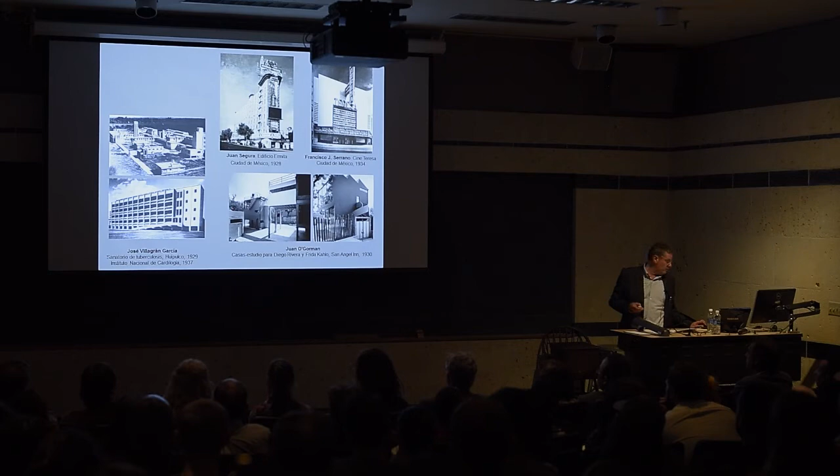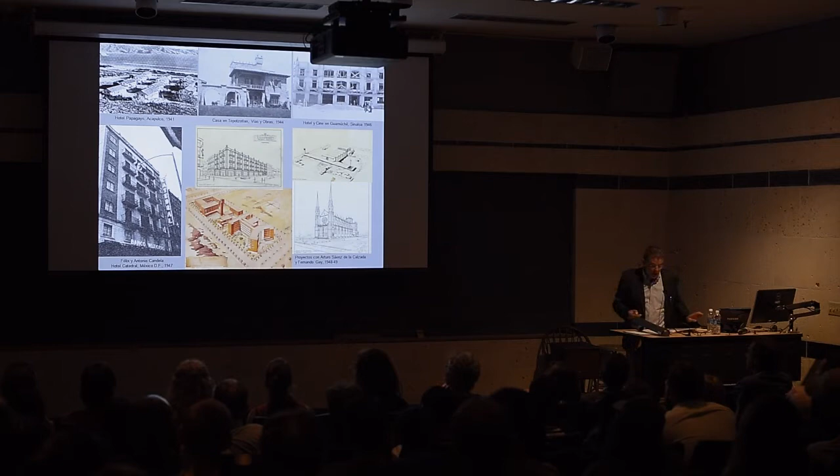And those are some of the projects which Candela made in his first 10 years in Mexico. If Candela had continued doing this kind of buildings, we wouldn't be speaking now about him. What is it that he made which brings us to talk about him nowadays?

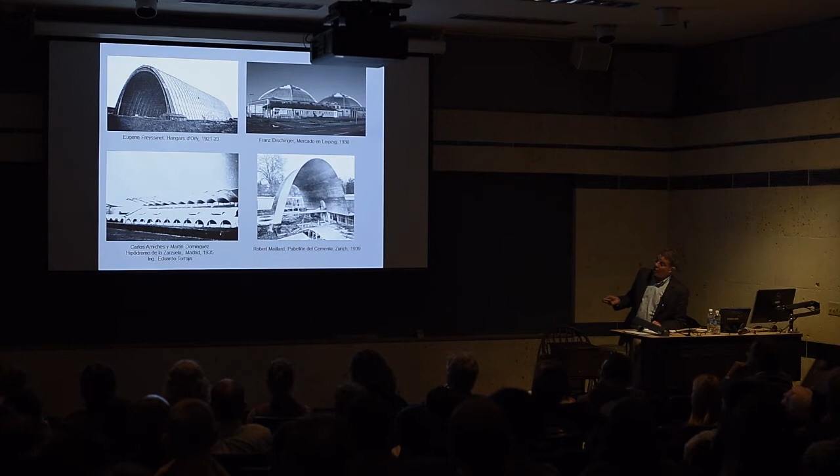This is what was on Candela's mind when he arrived in Mexico: the state-of-the-art technology in construction happening in Europe between the First and Second World Wars. Laminar structures of reinforced concrete, best known as shells, developed by Eugene Freyssinet in France, Franz Dischinger and Ulrich Finsterwalder in Germany, Eduardo Torroja in Spain, and Robert Maillart in Switzerland.

10 years after his arrival, he was able to build his first experimental shell structure, a catenarian vault, built in 1949.

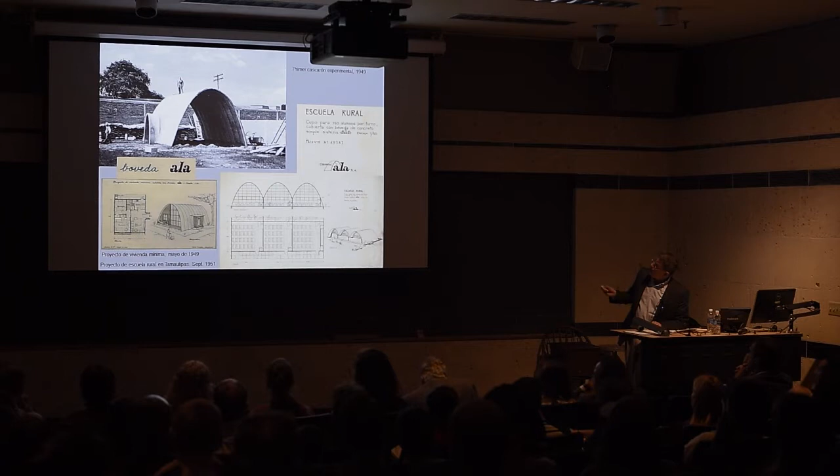In 1950, 10 years after his arrival in Mexico, Candela founded Cubiertas Ala, a construction company with a name that evokes lightness and flight—Ala means wing in Spanish—Cubiertas Ala, wing covers, with his partners, two brothers, Mexican architects Fernando and Raúl Fernández Rangel, and his two siblings, Antonio and Julia Candela.

From his company, Candela built the concrete shells that made him internationally famous during the 1950s and 60s. His work revolutionized architecture using European technology that flourished in Mexico's soil, where it reached extraordinary quality and dimensions. He was neither the only one nor the first to build this type of structure, yet he opened new paths in the discipline through the use of the hyperbolic paraboloid, taking full advantage of its expressive and structural possibilities.

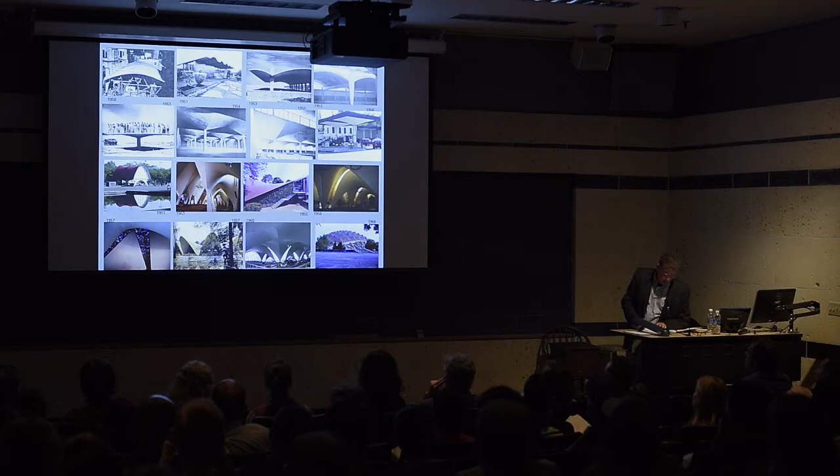One of the many structures built by Candela, whose resistance depends on shape—the majority relied on the geometry of the hyperbolic paraboloid, or hypar.

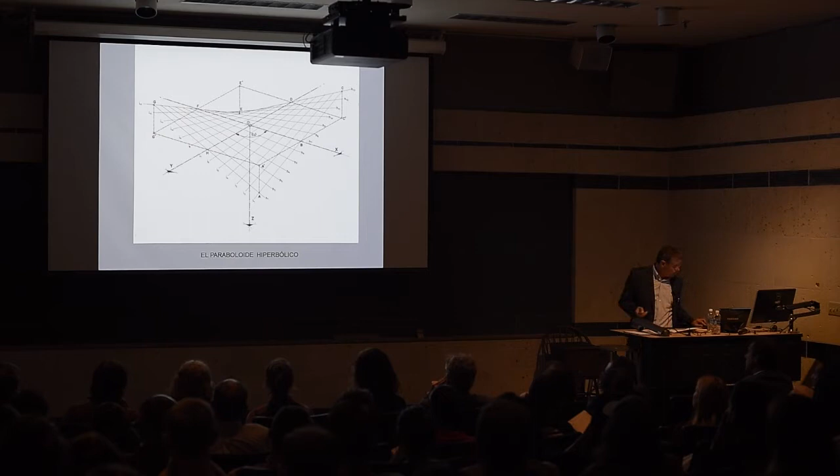This geometric form is an anticlastic double inverse curvature, meaning that both curvatures have opposite concavities. It is a ruled surface built by straight lines, which facilitates the construction of a scaffolding made of straight wooden staves that generate the warped surface. The main characteristic of these shapes is that they transmit almost exclusively membrane stresses, allowing for the construction of very thin plates of constant thickness, generally around 4 centimeters, less than 2 inches.

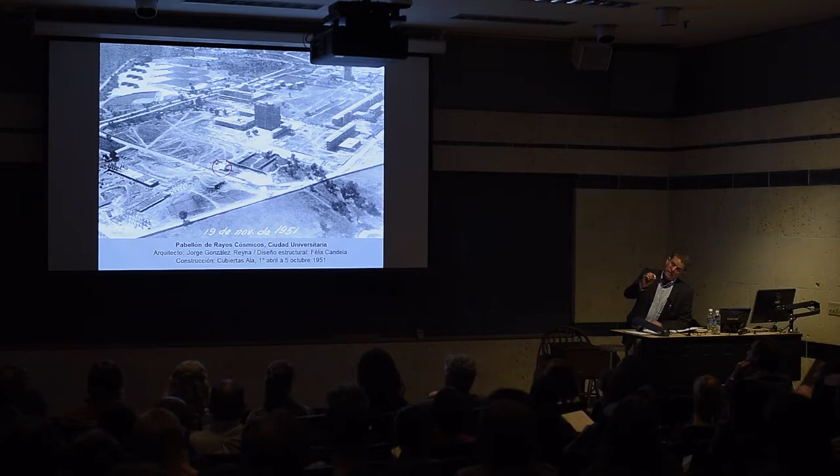One of the first clients of Cubiertas Ala was the architect Jorge González Reyna, who in 1951 was charged with designing a building for the Institute of Nuclear Physics in the new University City of Mexico—this is the Ciudad Universitaria in construction—and was confronted with an apparently unsolvable problem: the cover for this little building could not be more than 15 millimeters thick, half an inch.

Candela provided a solution, taking advantage of the situation to use for the first time the hyperbolic paraboloid shape that he knew from a book published by the French engineer in 1936. The roof was formed with two saddle hypars, thus creating the small Cosmic Ray pavilion.

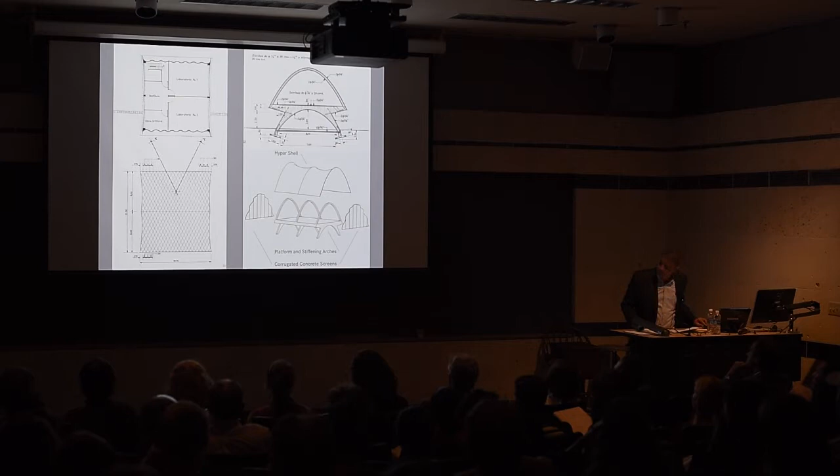This shows how a hypar could be formed by a horizontal plane and two vertical planes, making the saddle hypar.

Through the construction, Candela literally experimented and solved problems along the way. Once the geometry of the shell had been determined and its structural calculation completed, the building process required the participation of a veritable army of collaborators: skilled carpenters to build the scaffolding, and many masons to lay down the structural steel, pour the concrete, take down the scaffolding, and finish the details.

This is an announcement Candela published in a review in September 1952 about the Pabellón de los Rayos Cósmicos en la Ciudad Universitaria, the Cosmic Ray Pavilion in University City, covered with a concrete shell half an inch thick.

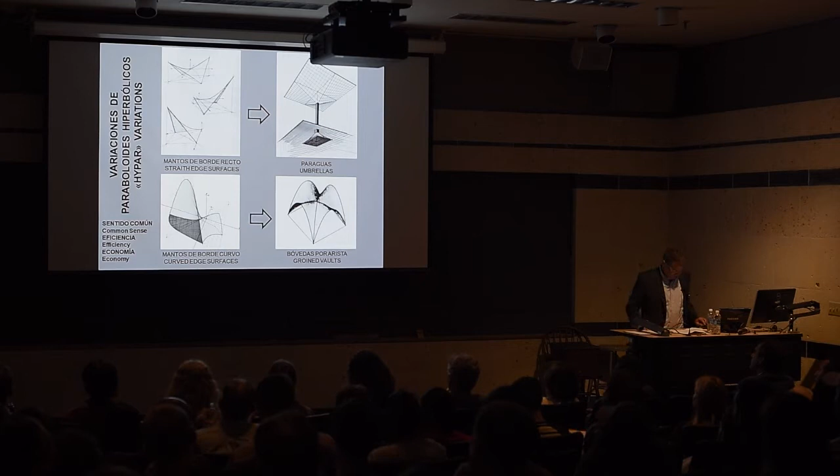Cubiertas Ala developed an impressive number of built works in their approximately 20 years of existence that can be divided into 2 big families: straight edge and curved edge shells. They did so by following 3 precepts considered essential by Candela: common sense, efficiency, and economy of means.

Through his company, Candela established professional contact with the most significant members of the architectural landscape of Mexico at the time. Among the colleagues that solicited his collaboration were architects of great renown, like Mario Pani, Juan Sordo Madaleno, Enrique Yáñez, Pedro Ramírez Vázquez, Enrique de la Mora, etc.

In the catalog of projects and built works of Cubiertas Ala, there is a list of more than 1,400 commissions, of which close to 800 were built. In this professional collaboration, Candela's role consisted in solving the structural design of the roofs, reviewing the proposals presented generally as mere sketches in order to give them geometric definition, systematize them, turn them into blueprints, make the necessary calculations, and convert them into built works.

In 1959, he described the process as follows: I spend most of my time telling people that I cannot do the things they ask me to do, or that I cannot do them the way they want them. The main work I do consists in simplifying and regularizing the sketches I am presented with, and in convincing the clients that success does not consist in building extravagant forms, but in achieving simple forms, developing the details with affection.

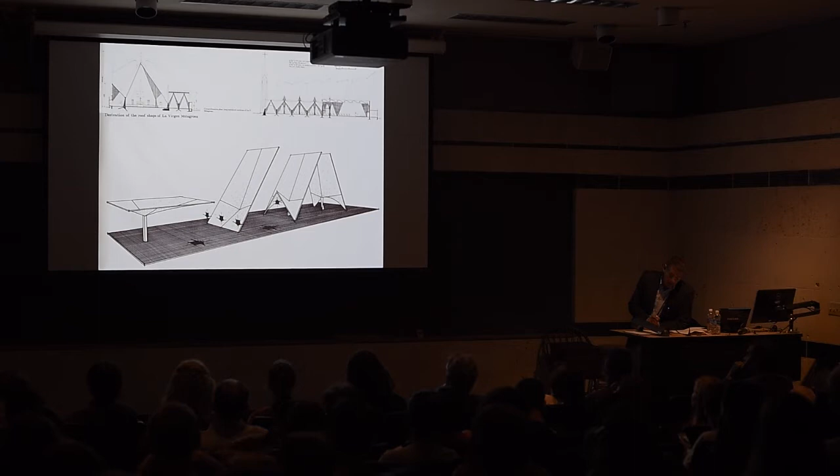Shell structures reached the height of expressivity when covering religious spaces. The first temple Candela built was the Virgen de la Medalla Milagrosa, Virgin of Miracles Medal Church, between 1953 and 54, about which he wrote: The material of our time is reinforced concrete, and I have tried to build with this material a church with a traditional character in which both the structural function and the internal expression depend completely on its form.

As this church was under construction, he began what would become the most fruitful collaboration of his career with the architects Enrique de la Mora and Fernando Lopez Carmona. This collaboration started in 1953 with the project of the roof of the trading floor of the Mexican Stock Exchange, Bolsa Mexicana de Valores, in the historic center of Mexico City, which represents the first hyperbolic paraboloid vault built with hypars in the world, a veritable Mexican contribution to the history of construction.

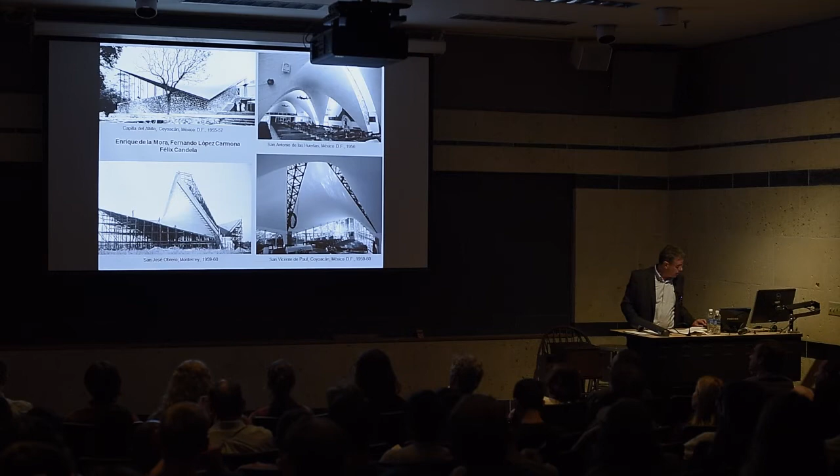The rich collaboration was followed by other works, overall temples like El Altillo in Coyoacán, San Antonio de las Huertas in Calzada México-Tacuba in Mexico City, San José Obrero in Monterrey, and San Vicente de Paul in Coyoacán too. It was at this time that Candela began to teach in the Escuela Nacional de Arquitectura de la Universidad Nacional Autónoma de México. This is Candela teaching in my school.

Let's see some straight shells. This is El Altillo Chapel, a beautiful chapel covered with only one hypar of straight edge, with the print or the footprint of the formwork.

It's very important. This is in Monterrey, San Jose Obrero, and this is in Coyoacán too, San Vicente de Paul, inspired by the hat of the nuns. And this is Candela with Enrique de la Mora, el pelón de la Mora in Spanish. El pelón, how do you say el pelón in English? Bald. Okay.

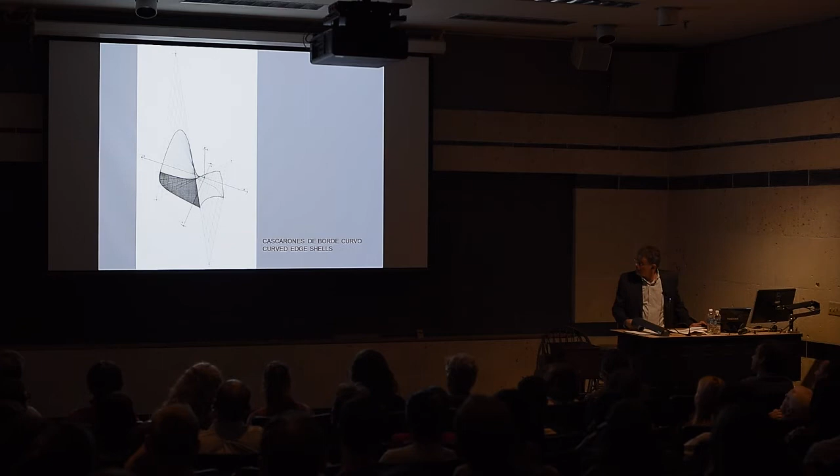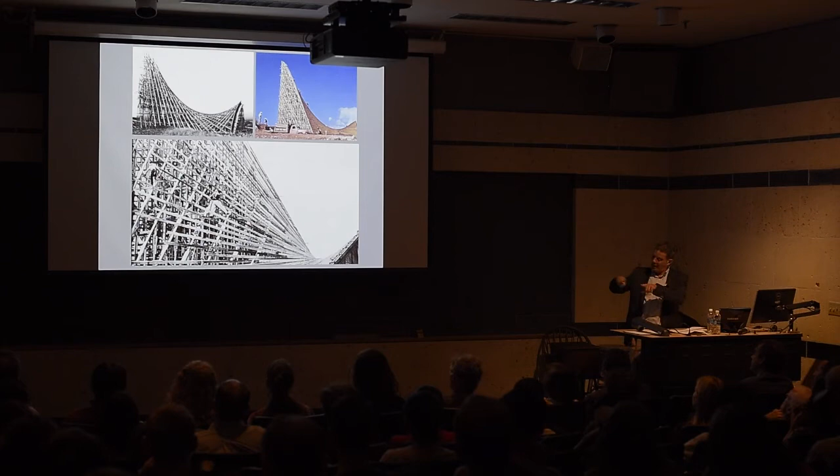Let's see some curved edge shells. This is a beautiful chapel in Cuernavaca, Palmira Chapel. Can we see the formwork? No, incredible. All are straight lines that move in the space to make the double curvature. And this is finished. It's beautiful because it takes advantage of the land and gives the benches their shape.

In 1961, Candela received the Auguste Perret Prize. The International Union of Architects gave this prize in London in 1961.

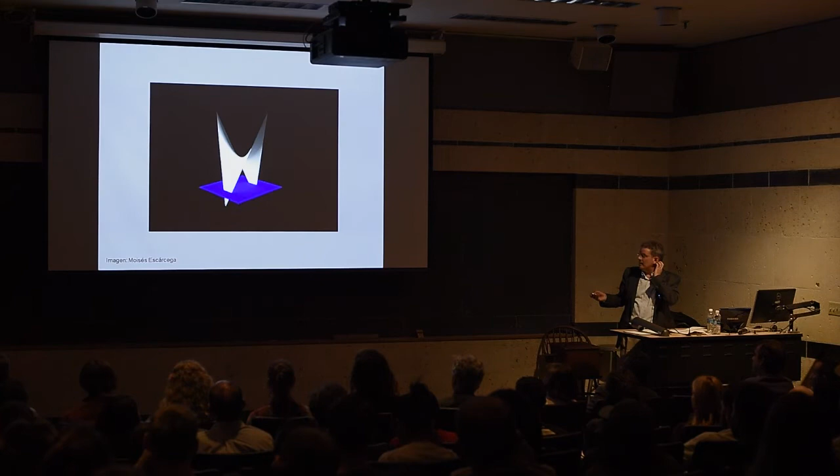Return to see this incredible roof. Where came the idea of the groined vault invented by the Romans 2,000 years ago, but the first time built with a groined vault made by hypars. This is the same idea, the saddle hypar, which intersects with another one and makes this beautiful shape. This is the construction and the finished work.

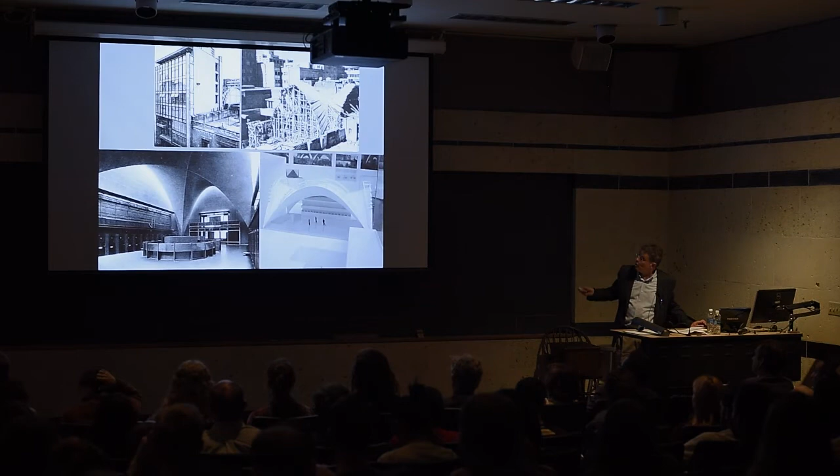Then Candela and Enrique de la Mora y Lopez Carmona used this kind of roof in another work. This is the San Antonio de las Huertas church, a beautiful church made by three groined vaults.

This is a beautiful mural where Elvira Gascon and other Spanish exiles painted, making the portrait of Enrique de la Mora, architect, el pelón de la Mora.

It's a beautiful interior, but maybe it's the ugliest church in the world by the exterior. No, it's never ending, the idea of Enrique de la Mora.

And we will go to the south of Mexico City to see maybe the most famous shell of Candela, the Los Manantiales restaurant in Xochimilco, a beautiful place of canals and lake that forms this kind of flower, an 8-petal flower, made by 2 squares rotated 45 degrees.

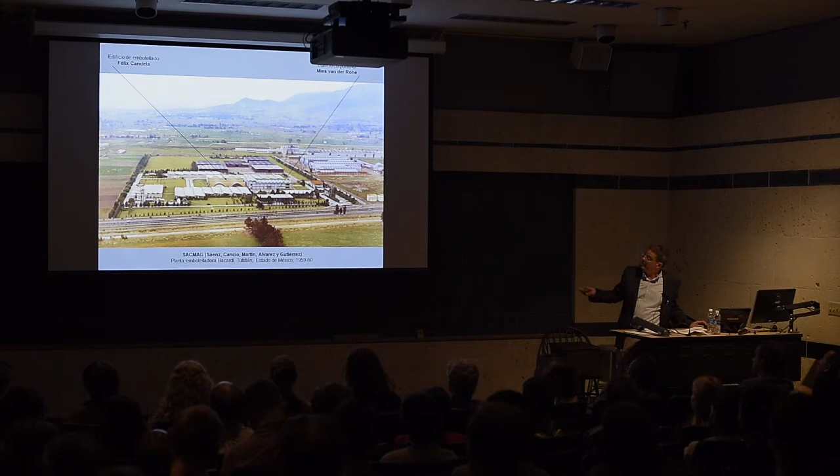And now go to the north of Mexico City to see a sample of the cubiertas ala made, and the only building that Mies van der Rohe built in all of Latin America, the Bacardi building, the Bacardi headquarters.

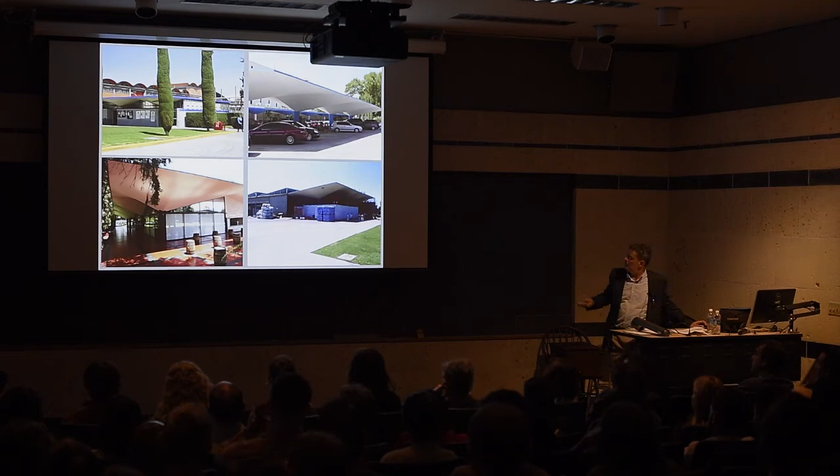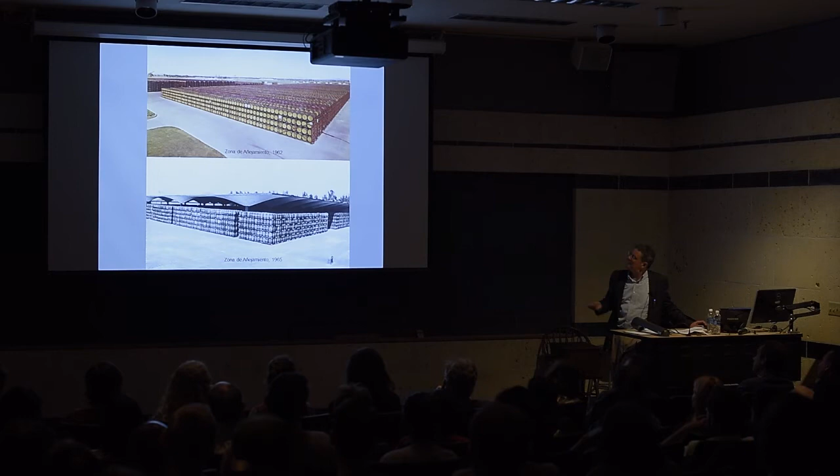This is cylindric vaults, umbrellas in parkings, in the storage. Umbrellas to make shadow for the 4,000 barrels of rum, with this idea, very interesting.

Between support and support, usually there are 15 meters, but with this strategic form, Candela had 25 meters between supports. And the bottling plant, the first stage.

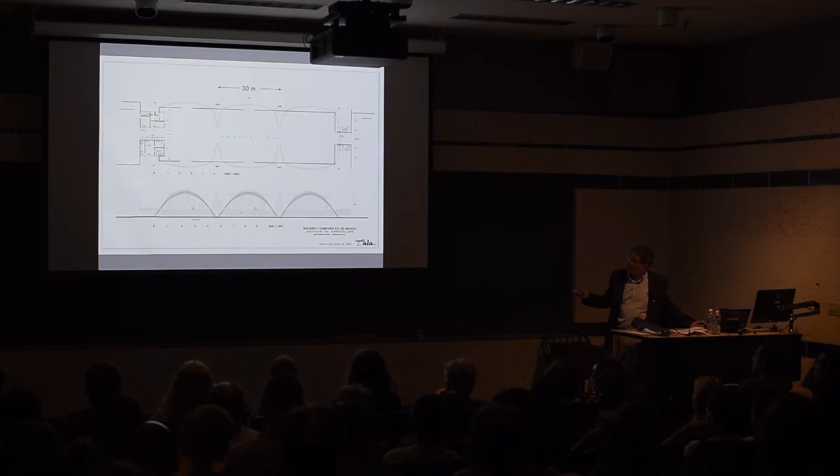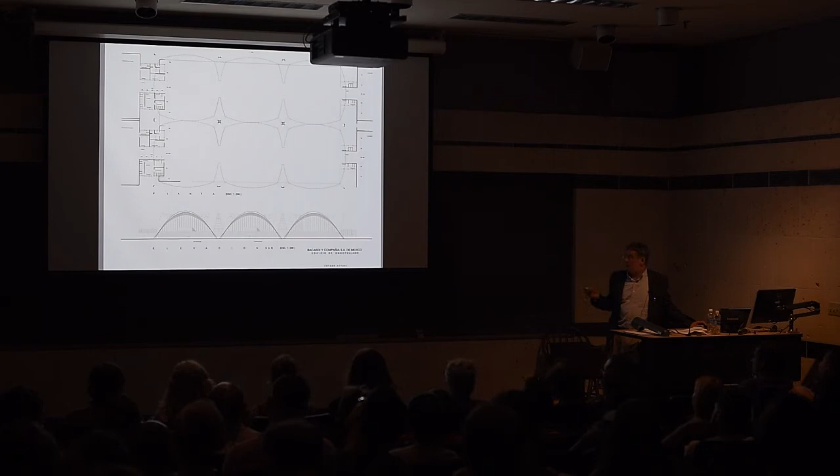The first stage with three big groined vaults, 30 meters from support to support, 30 by 90 meters, 2,700 square meters in the first stage. In the second stage, they mirrored it and made 60 by 90 meters, 5,400 square meters, to make this beautiful inner space.

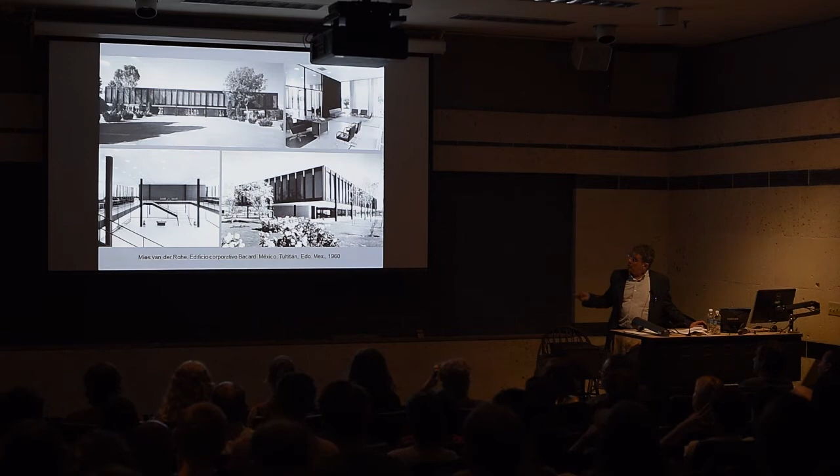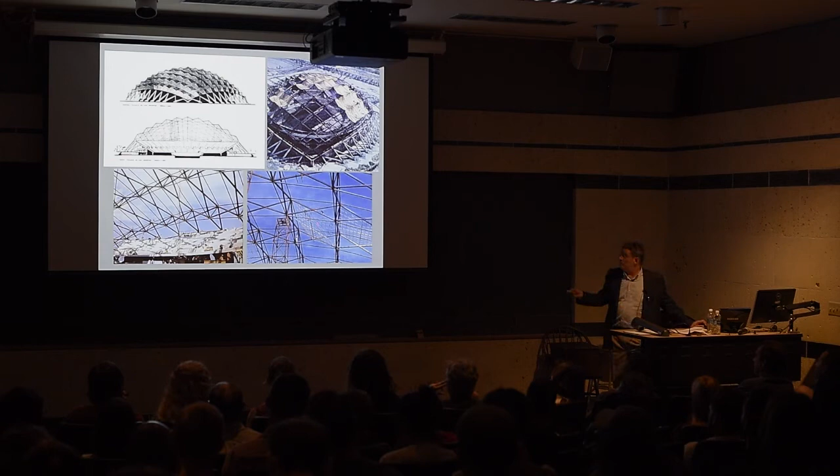And here in Dallas, Candela worked with O'Neil Ford and other Texan architects. Here in this school you have the O'Neil Ford archive, with the plans of the Great Southern Corporation and the Texas Instruments factory. And the first conference that Candela gave outside of Mexico was here in Austin.

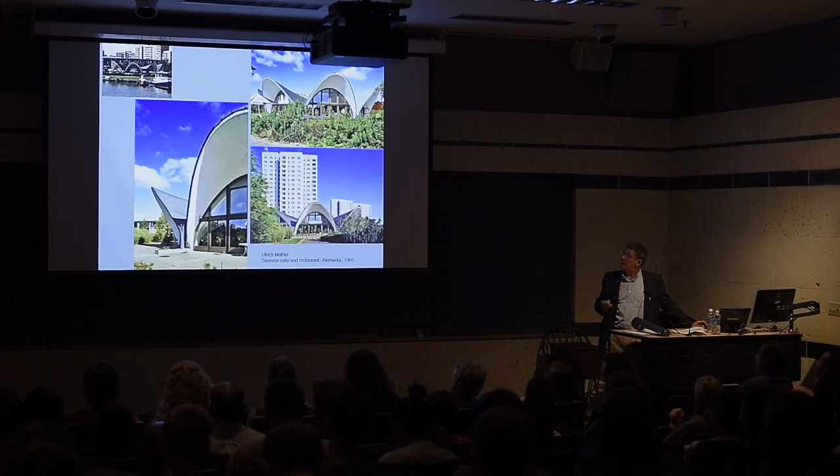In Norway, in Tromsø, there was a cinema that was converted into a public library some years ago. This is a Manantiales clone on the frontier of Ecuador and Colombia. This is the Amazon River. In East Germany, there was Ulrich Müther, an engineer who built shells inspired by Candela.

And this is the posthumous work of Candela in Valencia, in the Oceanographic Park. He made an imitation of the Manantiales with a few changes, but he died in 1997 when he had been working on the project for one year, and it opened in 2002. It's near the famous work of Santiago Calatrava, the City of Arts and Sciences in Valencia, near the last work of Candela.

This is Santiago Calatrava with Félix Candela when Joan Miró met both of them in Madrid. And this is the philosophy of Candela and the philosophy of another genius, Santiago Calatrava. I like to compare these philosophies with these images. Candela is the athlete like Usain Bolt, nothing extra, the most efficient, and Calatrava maybe like Schwarzenegger, with muscles all around.